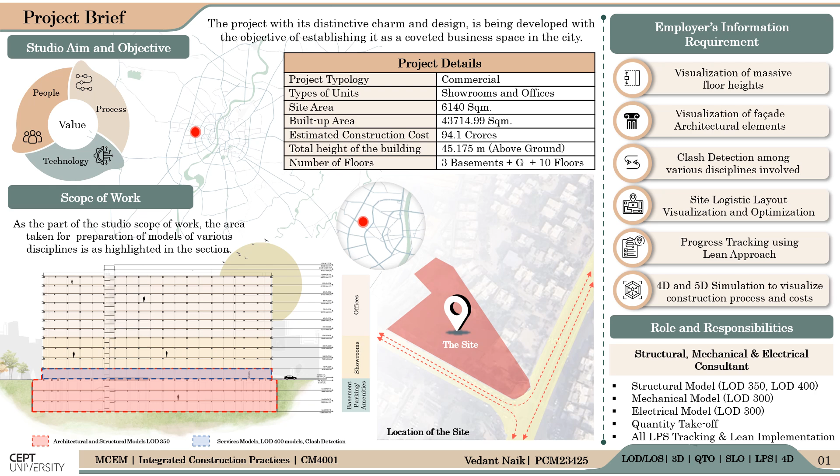Moving ahead with the level of development versus level of schedule. LOD is basically the detail of BIM elements at different stages of a BIM model, and LOS classifies the scheduling and sequencing information as per the BIM model.

The process followed for LOD versus LOS: firstly we define the model element author, then we assign the author to appropriate LODs, then prepare the schedule and make the LOD versus LOS table. The table on the left showcases the model element authorization, for which this is the example of the architectural model.

For example, wall is the model element. For that we have modeled two categories: one is AAC blockwork and the other is curtain walls. The author for that is architect, and that element is targeted in the architectural LOD 350 model. The author is architect, denoted by A, and all other consultants are the user.

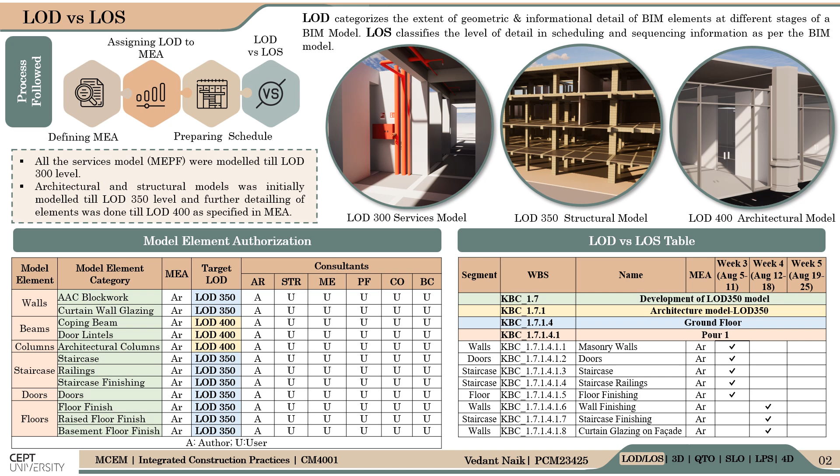The table on the right showcases the LOD versus LOS, where the detailing of the model element is linked with the model delivery schedule. The whole process is done for each and every model of different streams. The tables displayed here are for example only.

For the 3D modeling, as per my role, I was responsible for preparation of 3D models for structural and ME discipline. The first rendered image shows the structural LOD 350 model, and the zoomed image shows the curvature part of the building. For the LOD 350, elements like column, slab, beam, shear walls and ramps were modeled with their accurate size and shapes, and material specification was assigned.

The LOD 400 structural model consists of the reinforcement detailing for the ground floor, where accurate reinforcement detailing was done for each dia of bar with the hooks, chairs and stirrups.

For the electrical model, LOD 300 model was prepared for the ground floor. The elements modeled for the same were cable trays, conduits, lighting fixtures, and distribution boards.

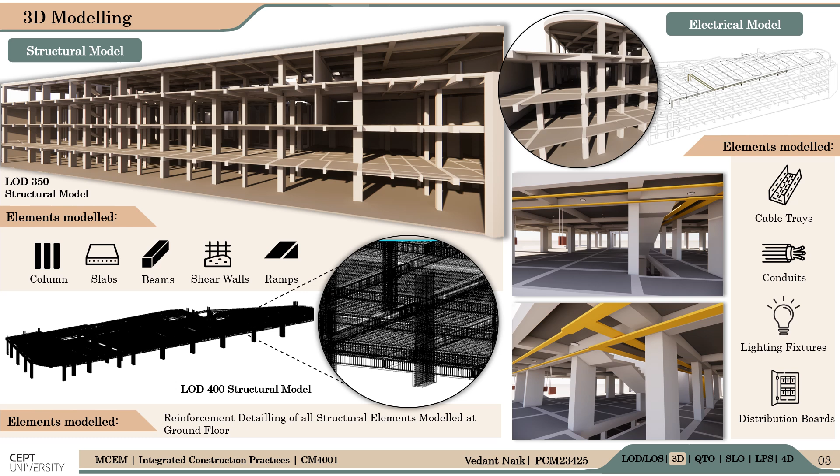The rendered images for the same are also presented.

From the prepared models, we have done Revit quantity takeoff and compared it with the manual quantity calculated from drawings. This is the quantity takeoff for the structural model. The elements considered are column, slab, beam, shear walls, staircase and ramps, and the concrete quantity is calculated for all three basements and the ground floor.

The table shows the quantity comparison of manual and Revit quantity. The major variation is observed at the basement 1 roof slab level due to the complex level difference.

From the graph, it can be seen that the major variations are in column and beam, which are 9% and 12% respectively. The reason behind this variation is human error in the manual quantity calculation, as there is a level difference in the basement 1 roof slab level and the beam depth varies, as shown in the section of the AutoCAD drawing, causing a difference in the beam depth on the outer side of the building. But we calculated the manual quantity keeping the beam depth uniform throughout.

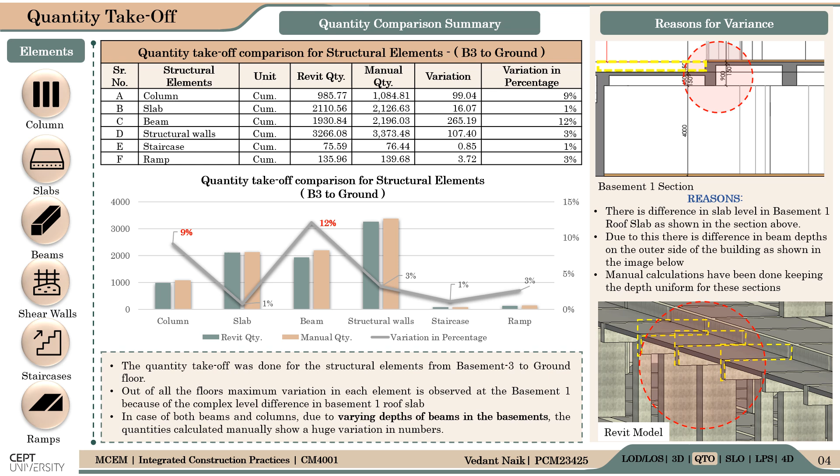So from this comparison, it can be seen that manual quantity takeoff is time consuming and prone to human errors, which could lead to cost overrun for the whole project, whereas Revit quantity is accurate and can be calculated quickly compared to the traditional approach.

Moving further with site layout optimization, we modeled the current site condition to visualize space utilization over the site. Based on the observed critique in the current condition, we have suggested a proposed layout. As discussed earlier, there is space constraint over the site as it is a bit congested.

The less steel storage space is the major issue on the construction site, as there is only 112 square meters available for steel storage, due to which there is no dia-wise segregation of bars. Also, the frequency of ordering is more, currently 11 days, which sometimes leads to unavailability of steel when required.

For the corrective suggestions, firstly we did the quantity takeoff of steel required for each typical floor from the LOD 400 model. As per data collected from site, approximately 7 typical floors can be cast in a year. Based on that, we derived the annual steel requirement, which is 873 metric tons, considering 5% wastage.

Based on the annual requirement, we calculated the economic order quantity, which helps us replan the steel storage space based on the minimum steel ordering quantity, and also increase the frequency of ordering, which also leads to reduced ordering cost of steel.

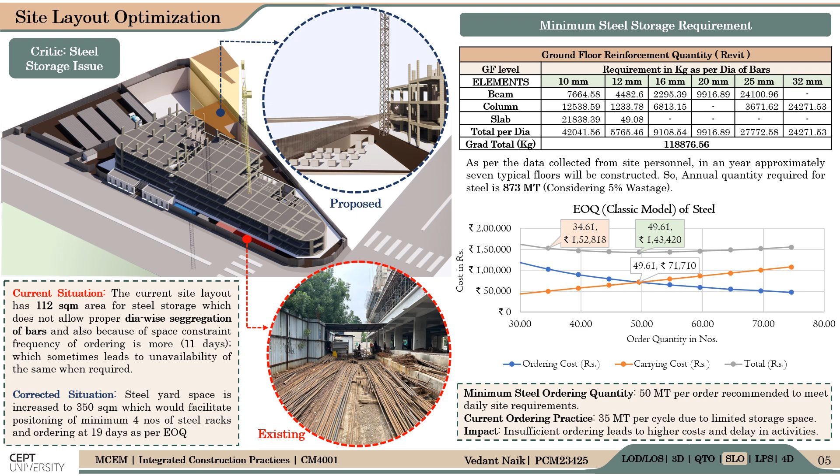And increase the ordering frequency to 19 days. As part of lean implementation, we implemented the last planner system approach on site, collaborating with the contractor to track construction progress.

The process followed was to understand the objective of the project and prepare a master schedule through work structuring, which was further simplified into a phase schedule. Taking into consideration the current site status, forecasts, and sequencing of work, a look-ahead schedule for 6 weeks was prepared.

Through pull planning and sizing the work we knew could be done, we made the weekly work plan, after whose execution the PPC was tracked and constraints were marked, which could be used for improved planning in further weeks and also for similar projects in the future.

As depicted in the pictures, we started off by discussing among ourselves and taking it to the site, tracking commitment of the tasks completed. An example of this is shown in the table below along with the constraints faced.

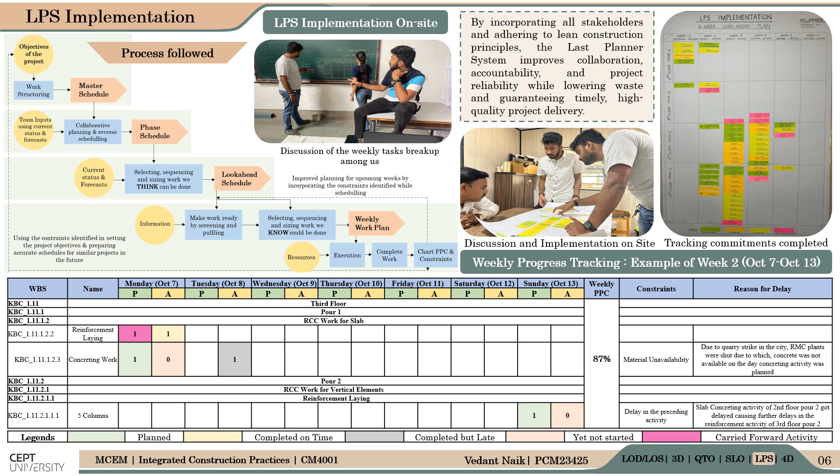The green color in the table shows the planned activity, yellow shows the activity completed on time, grey used for the activity completed late but within the week, and the pink shows the carry forward activity which is not completed in the previous week.

The PPC for each week is calculated using the formula as stated on top left corner. The PPC for each week is shown in the graph, and the number of planned, delayed and completed activities within each week are also shown in the table. From the PPC analysis, it can be inferred that the overall PPC were good for the site as they are

majorly planning their work on the tacit knowledge. But some variances were observed and categorized, which is unavailability of steel due to space planning issue and unavailability of concrete due to quarry strike. RMC plant were shut in the city.

From the variance category, the major variance observed is steel unavailability on site, which is also a major constraint identified, as it is delaying the succeeding activities and also affecting the project timeline.

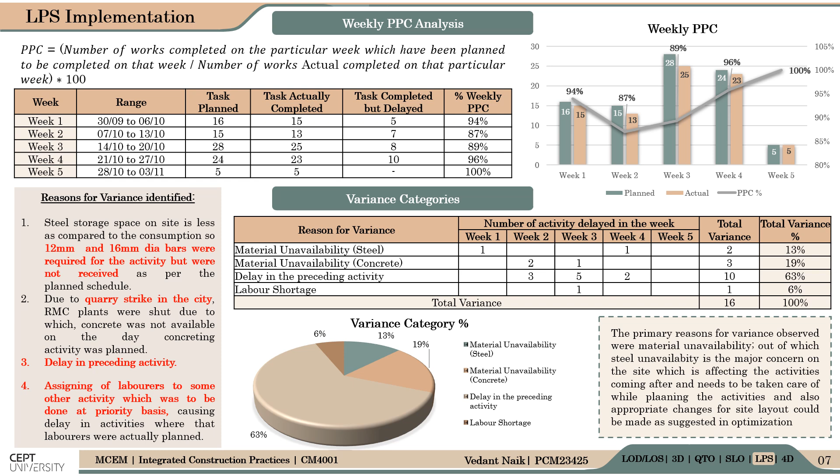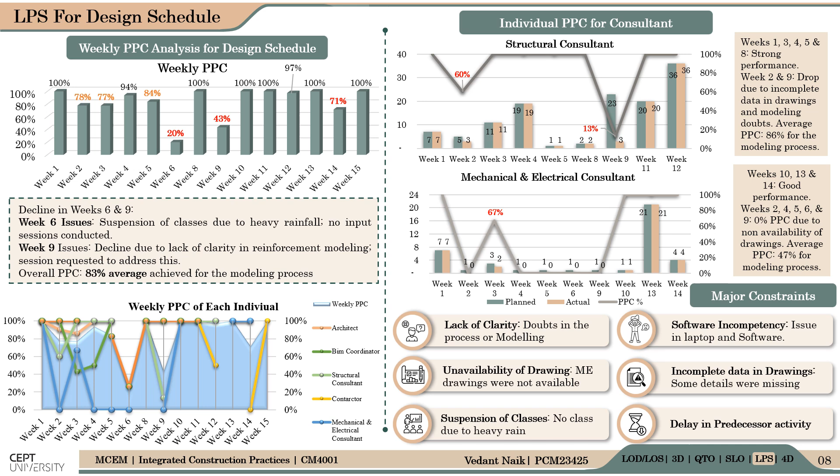incompetency, unavailability of drawings, incomplete data in drawing, and delay due to predecessor activity. Moving forward with the 4D simulation, on site there is difficulty in visualization of junction of curved beam and non-linear

column from the 2D drawings for the labors. So based on that, the simulation of the whole construction activity from reinforcing, shuttering, staging and concreting for that curved part was prepared for better visualization and understanding.

For that, assembly of cuplock system with verticals, ledgers, U-head, GI runners and 12 mm plyboard is used for slab and beam. And assembly of steel formwork with panels, tie rods and wing nut is used for column, which is same as used on site.

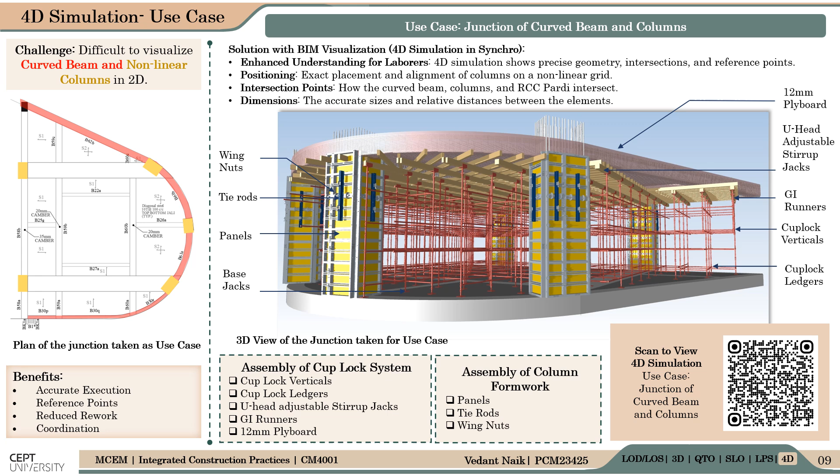This 4D simulation in synchro helps enhance understanding of precise geometry, intersection and reference points, and accurate dimension to labor. The scanner to view the 4D simulation is also provided.

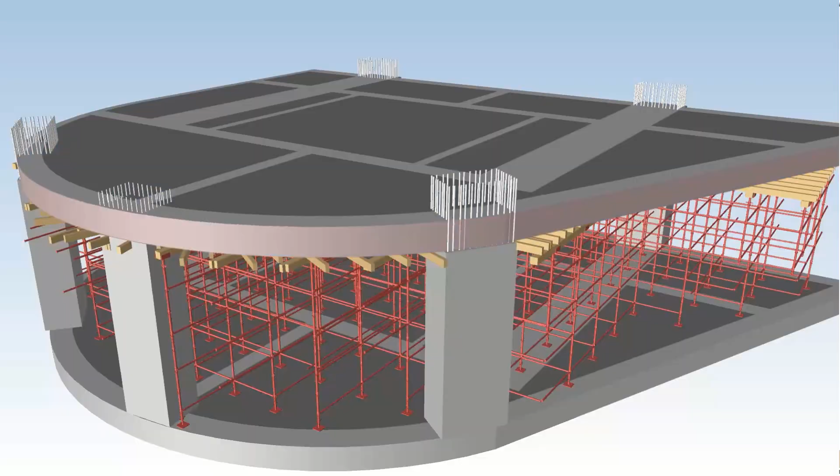Concluding with the key learnings, through this studio I have gained critical insight into various assignments. From the level of detail versus level of schedule, this progressive standard improves coordination, cost estimation and accountability compared to

static traditional methods. From the 3D modeling, detailed models and Revit adjustments strengthen collaboration and enable stakeholders to work with greater clarity. Further, with the quantity takeoff, BIM-based automation enhances accuracy and efficiency, reducing error which is common in

manual calculation. From site layout optimization, real-time adjustment and BIM tools streamline logistics, improving on-site efficiency over static planning. As from the last planner system, by integrating tacit knowledge into documented schedule, LPS reduces delays and rework, a critical

challenge which is in traditional approach. From the 4D simulation, this visualization aligns construction sequences, fostering better stakeholder engagement than traditional Gantt chart approach.

This learning shows that BIM isn't just a tool, it is a major shift, making ICP a superior choice for efficiency, adaptability, and collaboration in modern construction projects.

In traditional construction practices, fragmentation often limits collaboration, coordination, and efficiency. The integrated construction practices approach, powered by BIM, bridges these gaps, offering holistic solutions that enhance project outcomes.

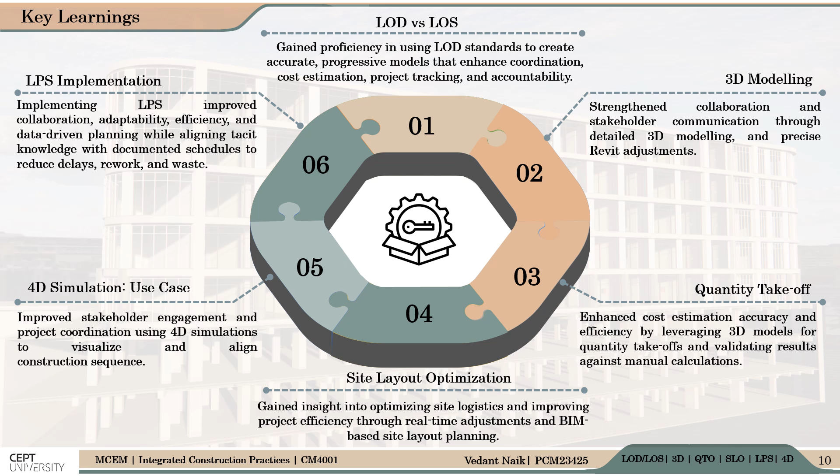Through these practices, the studio provides a comprehensive framework for achieving efficient project delivery, aligning design, technology, and management into a cohesive process. Thank you.